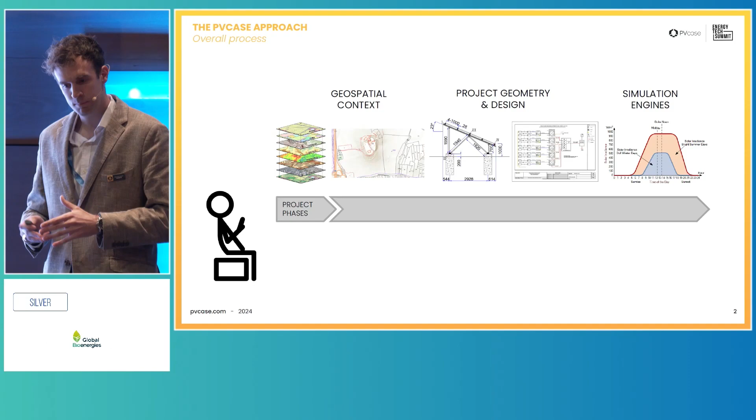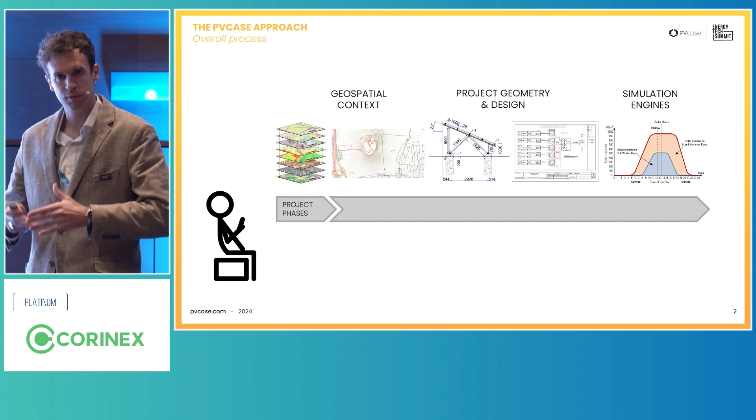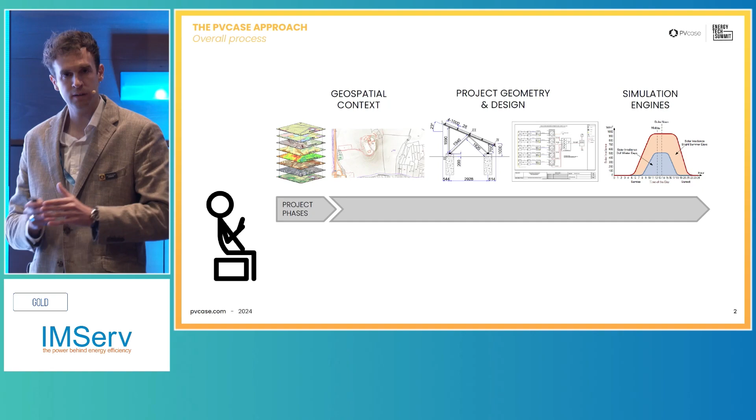Now, before I jump deeper within the topic, I would like to give some introduction, a little bit of context to the whole situation. We are part of the community of the PV industry, and we have realized that throughout all of the different stages or points that we need to cover through project development and project design, there are many different challenges that our users have to face.

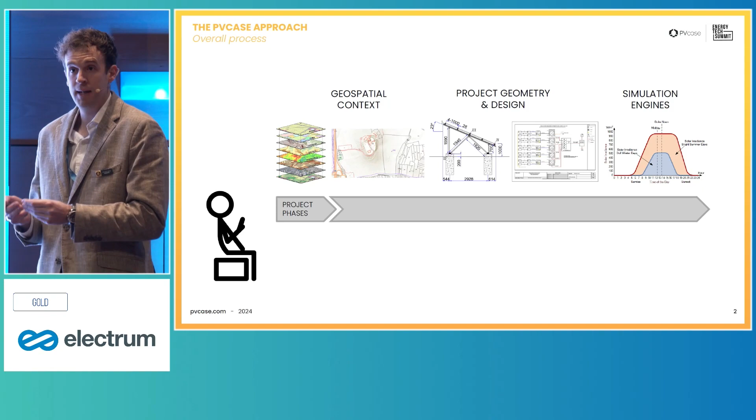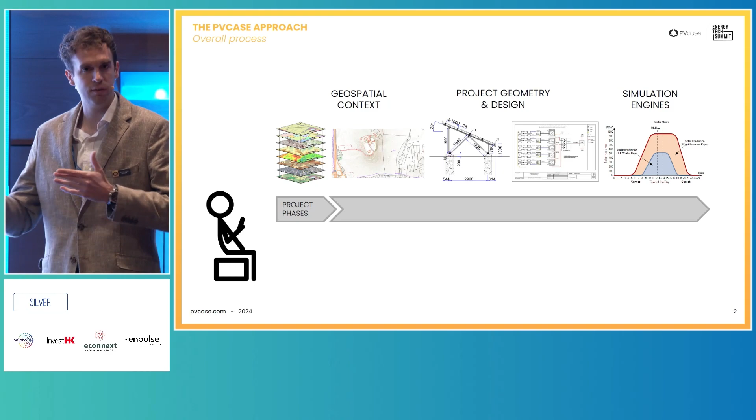So, for example, when we are talking about giving some geospatial context, or mechanical design, electrical design, or even going through the different calculations to check performance and energy production, there are many different issues or challenges that users face on a daily basis, such as me waiting on an email with information from a colleague, or needing to adapt things so that my team members can read and analyze what I am doing.

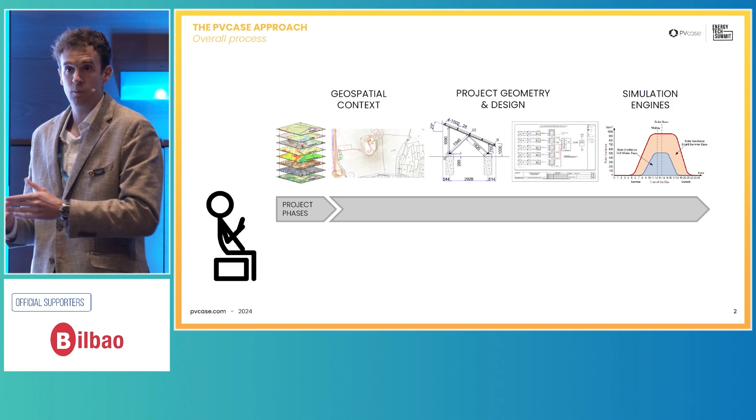So all in all, there are different things that we need to cover throughout all the project phases. The idea is that even though this is theory, from PVcase's side, we are trying to understand and see how everything works in real life.

So, apart from developing and designing tools to make things easier for users, PVcase is part of many trade shows and conferences, such as this one, or for example Solar Quality Summit in Barcelona last year. In this case, we wanted to test reality and see how everything works. We did a workshop with different groups of players, main personas within the PV industry, just to see how all of those interactions and connections are taking place in real life.

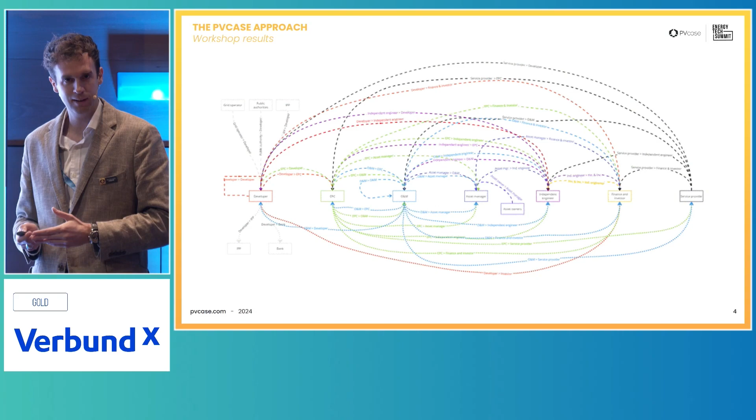This is reality, and as we can see, it is a full mesh of interconnections and interactions among all of the different players within the system. To give some reference on how to read this: the lines on top represent information sent from one player to another, whereas the lines underneath represent information received. So based on this, we can see how those interactions are taking place, who is sending more information, who is sending or receiving less, or who is remaining forgotten in the void. This is very interesting, and what we get from this is that the reality in the PV industry is complexity.

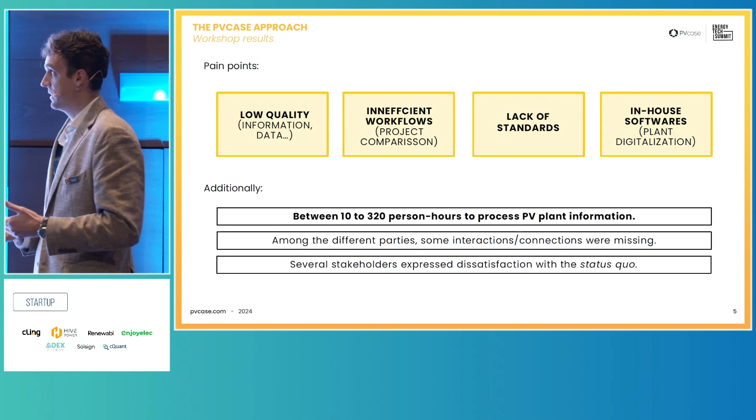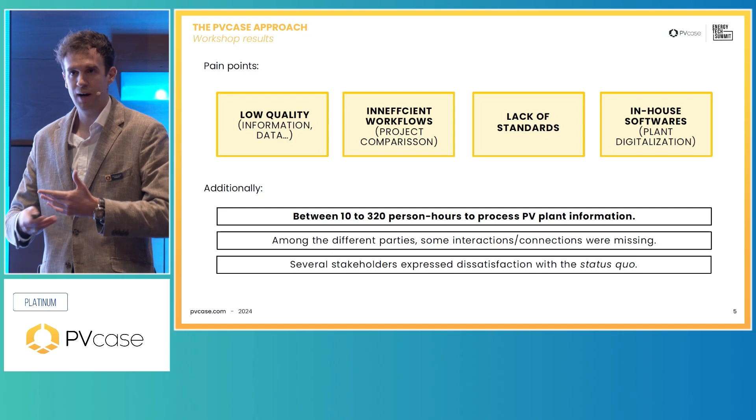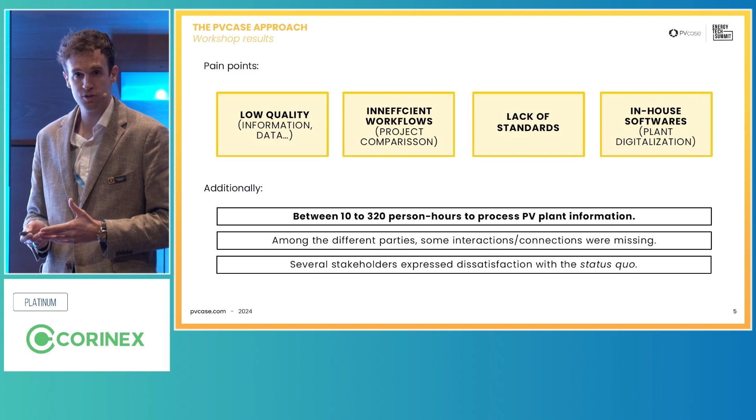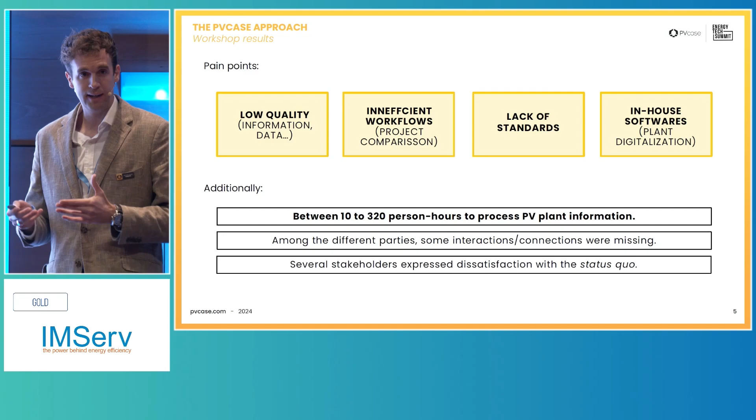This complexity can be summarized in 4 main pain points, if I may say it like this. The first one is low quality within the data, because if I need to adapt things, maybe I'm going to be losing something, or it's not going to be high quality throughout the whole process. Then we are talking about inefficient workflows, because if I need to invest time doing extra things just to overcome my situation, of course it's not efficient. Then we recognized there is a clear lack of standards within the industry, no references, nothing to support the whole process, and this is something that could be really useful. And of course, indirectly, because of this whole situation, everyone has to develop their own tools, their own solutions, and this is what we would call in-house softwares.

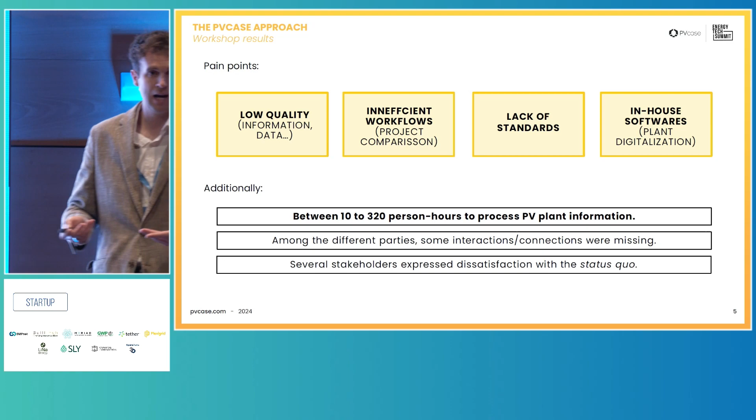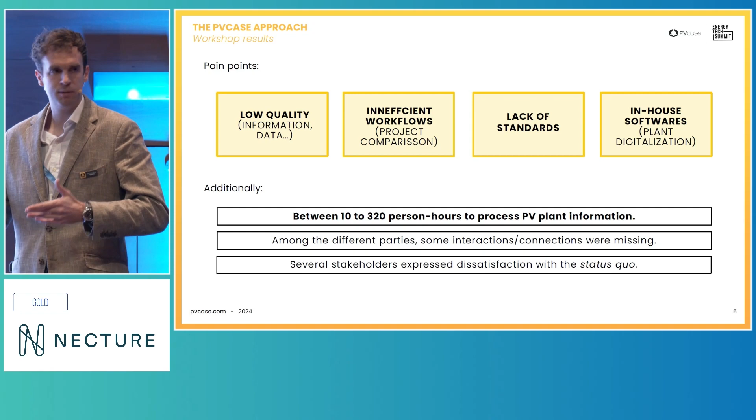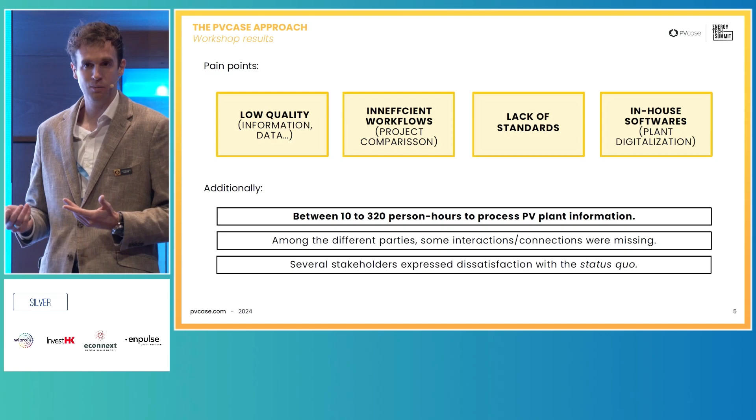All in all, while speaking with all of these players, we even recognized that sometimes we need to invest up to 320 person-hours just to overcome these workflows or inefficiencies, and this is something that, in my humble opinion, we shouldn't be doing, right?

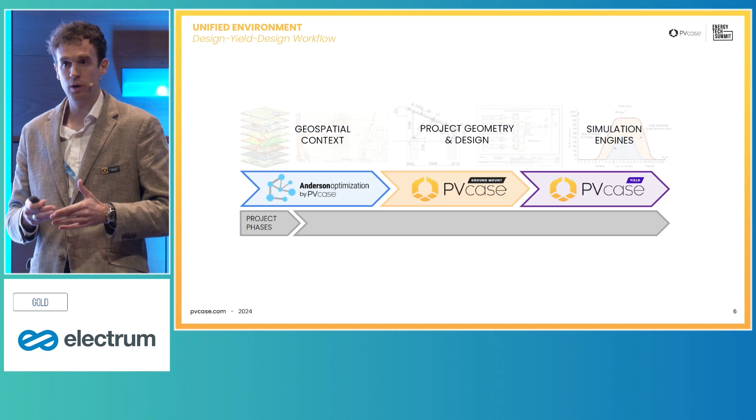Now, PVcase, while recognizing this and while working with everyone within the PV industry, realizes that this is something we need to tackle. Therefore, now we are present in all of those different stages or phases, starting from the geospatial context through Prospect, our tool that helps find parcels and analyze them automatically. Then we can proceed through the whole mechanical, electrical design, civil analysis of the power plant through PVcase ground mount. And while we are doing this, we work through the calculations and check the performance, how everything goes with yield.

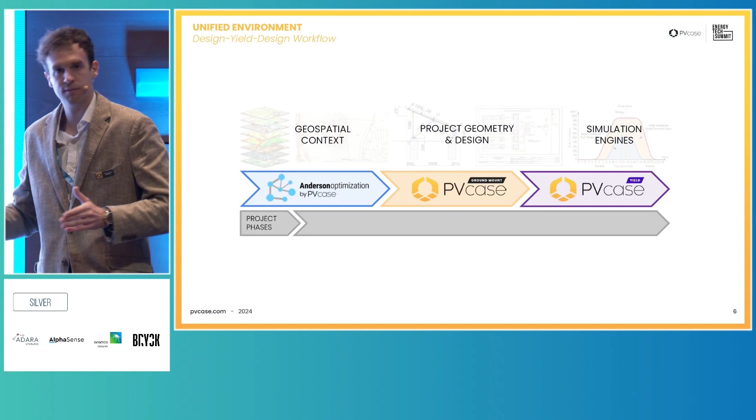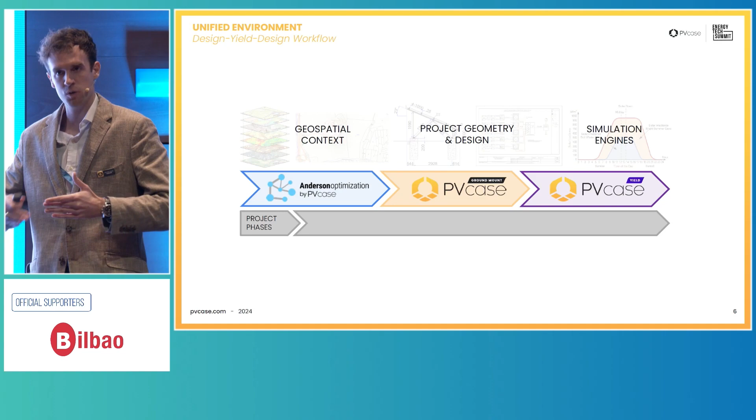So we are part of all the different stages, let's say, through the project development and project design. And the idea is that these tools work together in a unified environment that helps the whole process go smooth, with speed, with reliability, and that's the main idea.

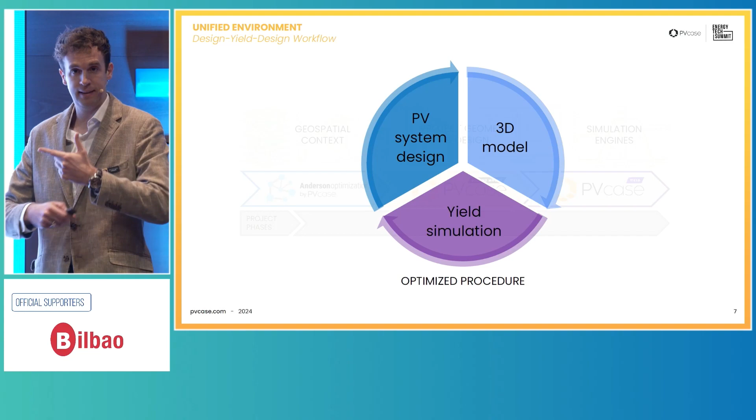This is done in a way that I can, for example, replicate and design as many times as I want one project. I can go back to my previous design. I can send these drawings, for example, to get the results in terms of production or performance. Then I can go back, and this is done in a way that I can repeat this as many times as I need in an optimized way.

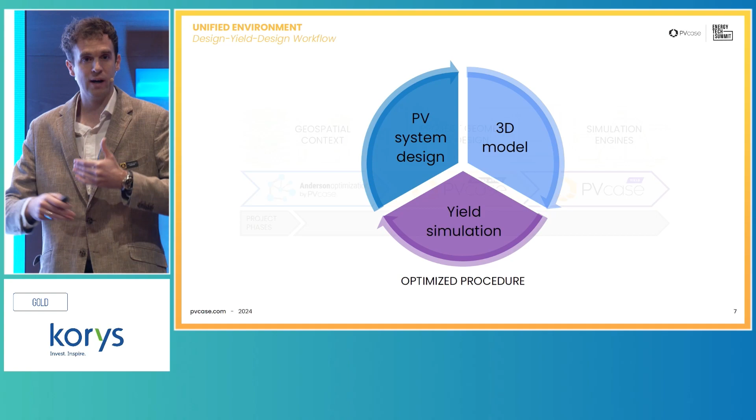And this is what we would be calling the design-yield design workflow. We are allowing anybody to go as many times as possible throughout the whole project design phase, getting to the results with speed and, of course, in an optimized way.

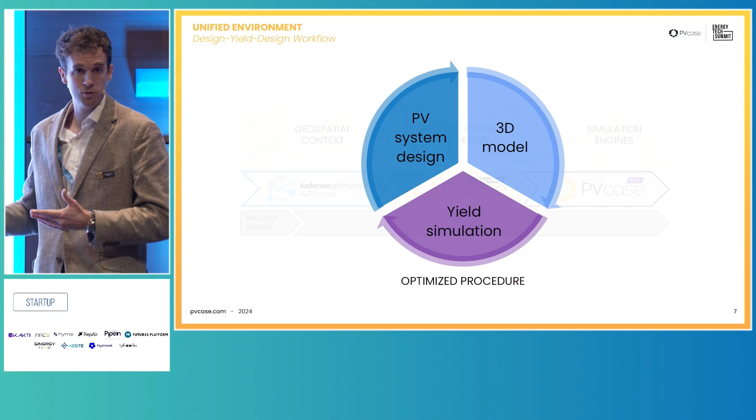This is how it sounds, and this is how it looks. So right here we have one video, so I'm going to call my technical team just so that we can share.

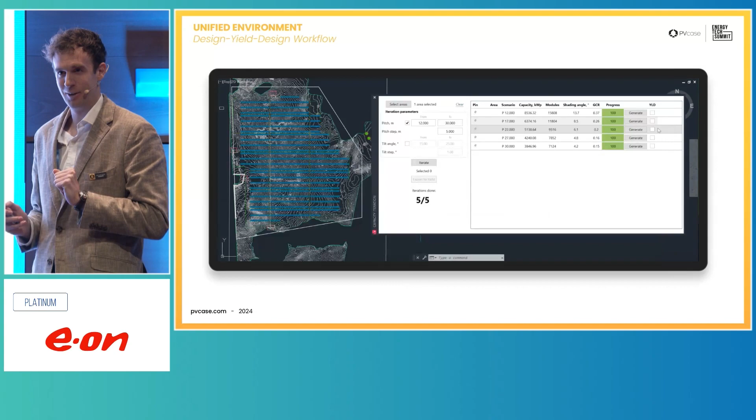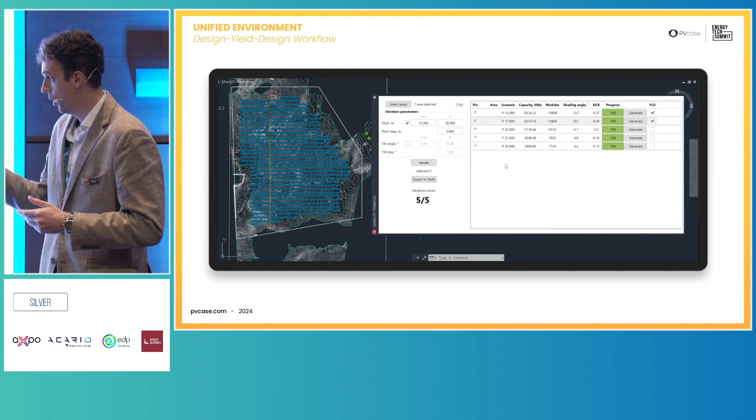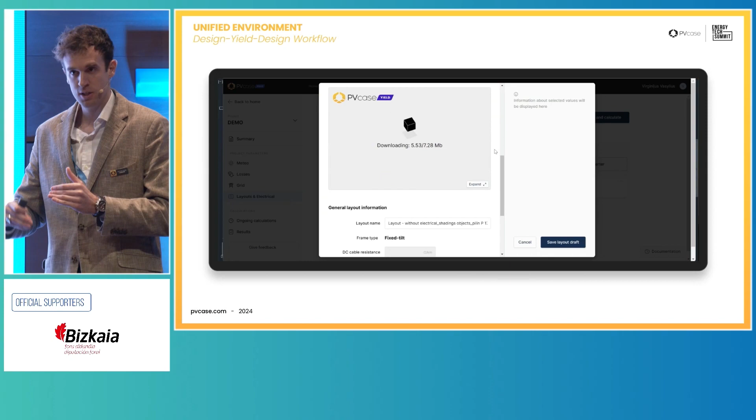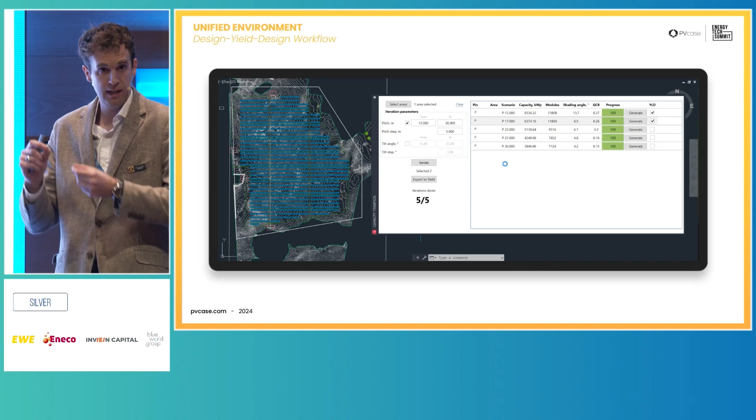Exactly, perfect. Right here we can see how our tools, in this case capacity iteration, work live. So what I am doing is designing, setting a couple of parameters, and leaving the program to generate many realities so that I can start doing the model comparison. Throughout this process, I can send this information directly to yield so we can review performance and production results. This is done in just a couple of clicks, and it is automatic. I don't need to worry about adapting or changing anything, because the tools are connected and integrated within this unified environment.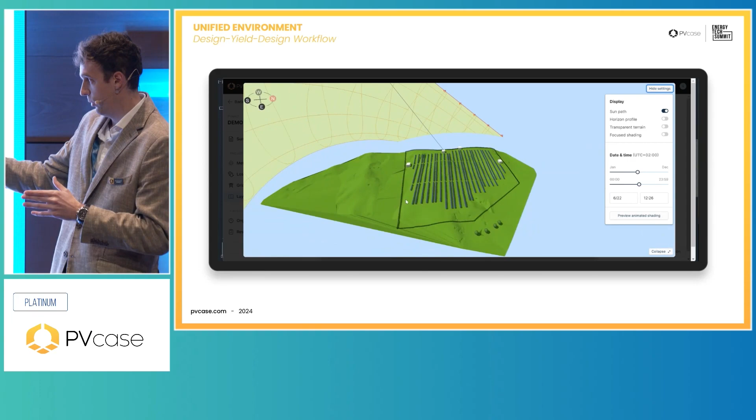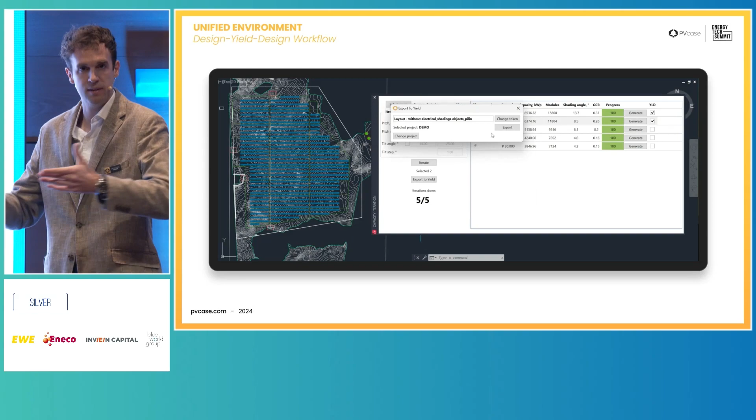Once we have the design on yield, we get to the 3D modeling scenario, where we use ray tracing technology to get the most optimal results within the design. Okay, thank you. Now we can go back to the presentation.

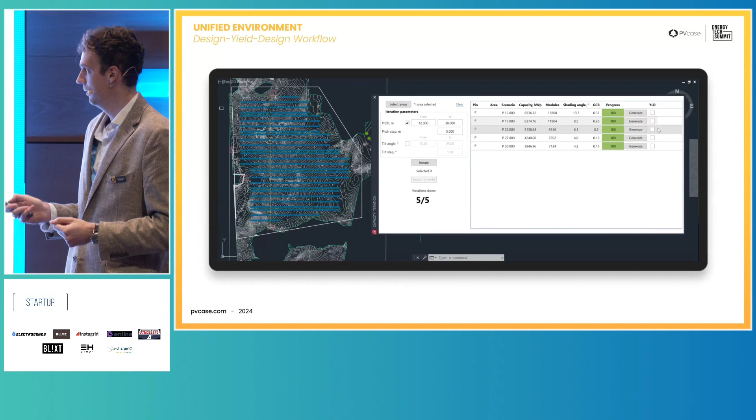Perfect. Nope. No, I think we have to go back to the PPT, which should be this one.

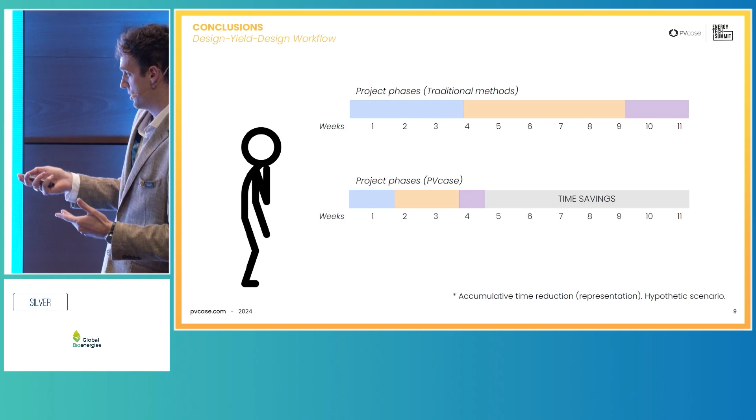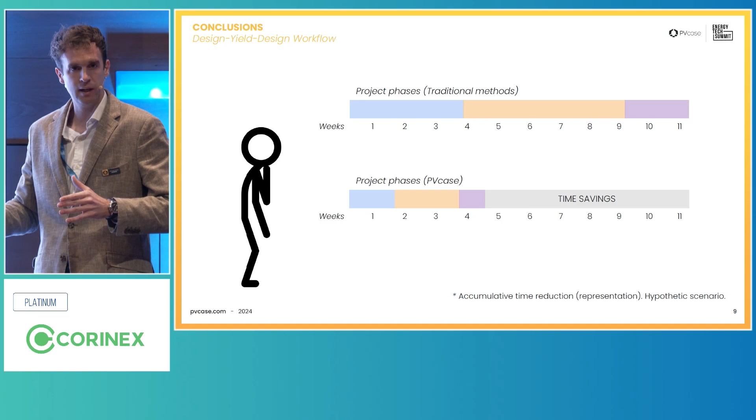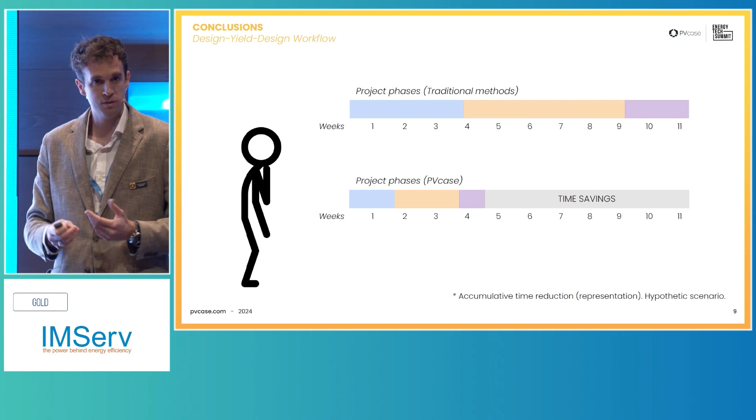Oh perfect. Because of this design-yield-design workflow, we gain very positive things. Apologies for the coloring, as it may be hard to see, but the idea is that with traditional methods we might be talking about 11 weeks for a project, maybe more, maybe less. But when we use this kind of solution and workflow, we're able to gain a significant amount of time. So we're talking about time savings.

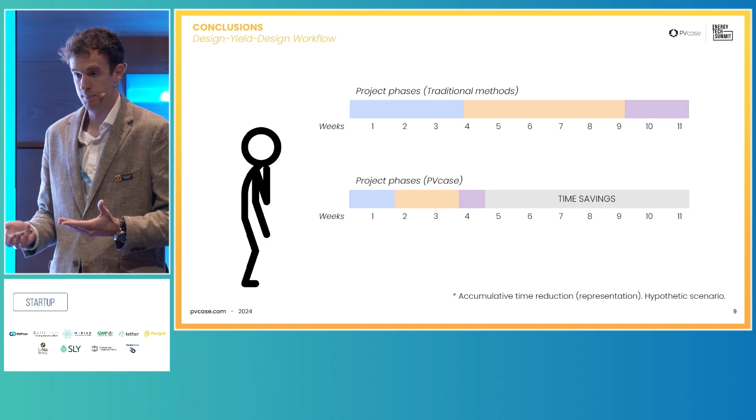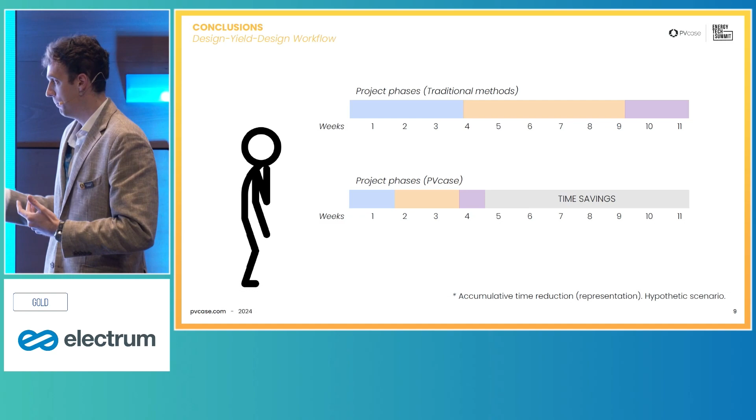This time savings represents resources. Of course, it represents time that I can invest in updating or improving workflows within my company, but also I can generate more product after gaining this amount of time.

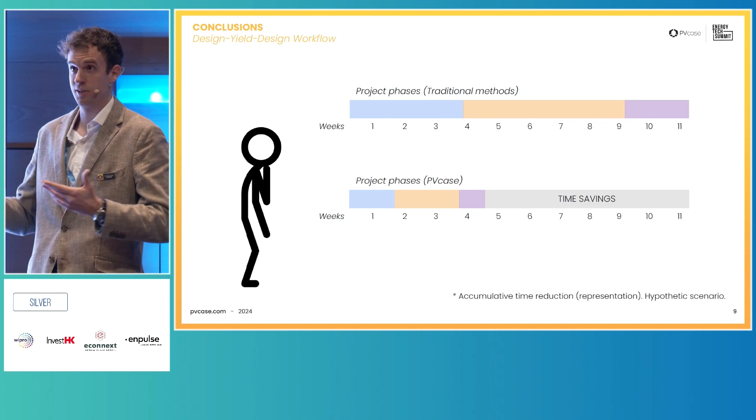Now you might think, okay Héctor, you're very positive and you're trying to sell us something. To be clear, this is not something I am saying—it's something our customers are saying on a daily basis.

In order to summarize everything we've seen, by using these methodologies and workflows, such as the design-yield-design workflow, we're able to get time and resource savings, and that is automatic.

We also increase the product pipeline—we're generating more realities and more projects with this optimized methodology or process. We work together to improve the overall process we saw through project development and design, and we avoid the widespread inefficiencies we've seen in the complex mesh of the PV industry. This is something we tackle directly.

And of course, we avoid the loss of information, what we call data risk, because everything remains within the same environment. So this is something we don't need to worry about—it's always part of us, and at any moment I can access and work with that information without relying on any external third parties to get results.